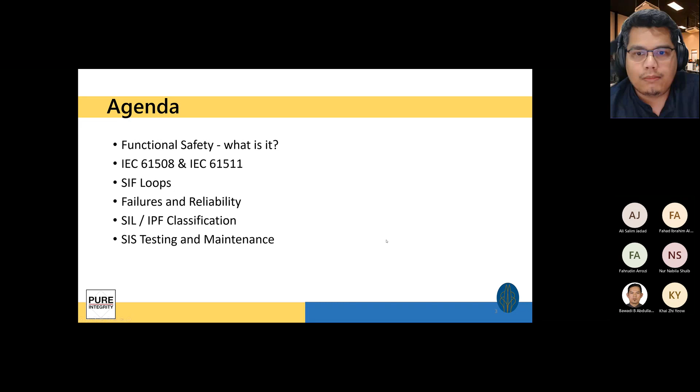So for us to understand safety systems and functional safety, we need to understand the history, we need to learn from the disasters that occurred that led us to requiring functional safety. As far back as 1976, we had a massive catastrophic incident in Seveso, Italy, where there was a large amount of dioxin released after an explosion. A large area was contaminated, eventually and unfortunately leading to a lot of people suffering from various diseases. It was in the 1970s.

Not 10 years later, in 1984, we had another catastrophic incident happening in Bhopal, India, where 40 tons of methyl isocyanate released after an explosion. It was estimated that up to 25,000 people were killed as a result of the disaster.

There are a lot more disasters, some very recent as well. But what impact did these disasters have on how we operate? These incidents made the world reconsider the safety approaches, especially when it concerns people and the environment. So the IEC published the functional safety standard, IEC 61508. And in Europe, there was a standard called the Machinery Directive, which is a legal requirement for machinery safety.

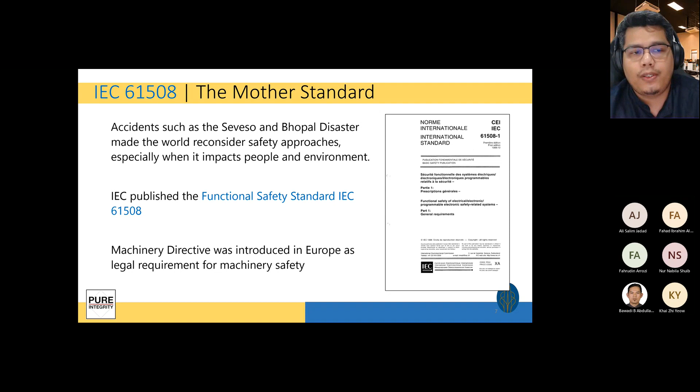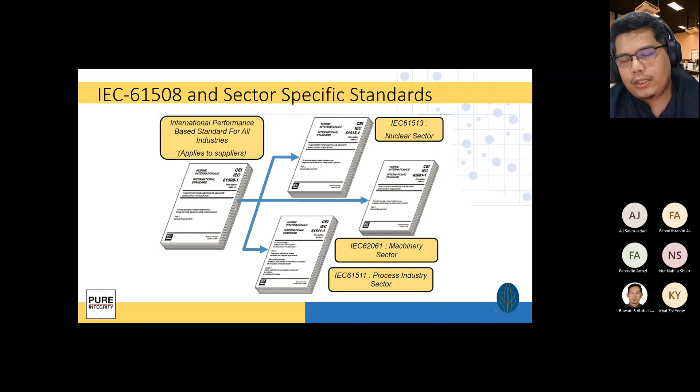So how does the IEC 61508 relate to the other sector-specific standards? The 61508 is the mother standard, from which there are sector-specific standards developed. Like for example, the IEC 61513 for the nuclear sector, 62061 for the machinery sector, and 61511 for the process safety, process industry sector. Our reference today will be talking a lot about 61511 for the process industry sector, which covers petrochemical plants, refinery, and so forth.

In terms of relationship between these two standards, 61508 is mainly the standard used for manufacturers or suppliers of safety devices. This would be companies like Yokogawa, Emerson, or Schneider Electric, who produce equipment used for the safety instrumented systems. In turn, the 61511 is mainly for system designers, integrators, and end users. So it's related, but in terms of its application and usage, is somewhat different.

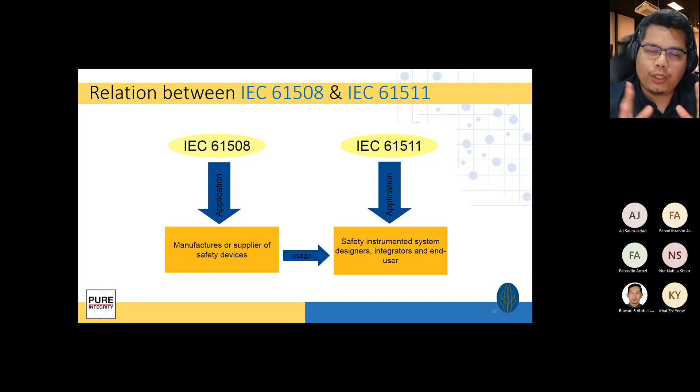So the 61511 scope again covers process industries. This includes chemicals, oil and gas, paper, pharmaceuticals, food and beverage, as well as non-nuclear power generation. It does not include embedded software, and it's intended for use by end users and system integrators. We'll be covering a bit later the lifecycle management, but essentially it covers the 11 phases within the functional safety lifecycle.

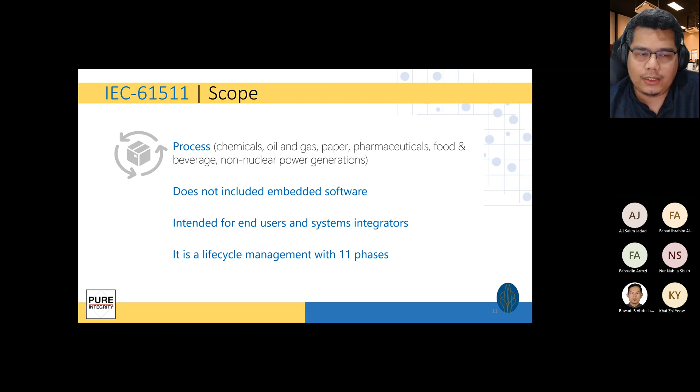So if you look at the 61511 standard, this is the safety lifecycle most often referenced when you talk about safety systems. It covers analysis - this is where you do your hazard and risk analysis, your allocation of safety function to protection layers, as well as the safety requirements specification for the SIS. So the analysis portion is mainly done mostly as desktop work.

The second phase is the implementation. So once you do your analysis, you've done your hazards, you've done your allocation, you've developed safety requirement specifications, and now it's to realize it into a system. This is where your engineering comes in, where companies design the safety systems themselves. It also involves installation and commissioning as well as validation. Not only do you need to design the safety system correctly based on the analyzed hazards, but you also need to install, commission, and validate that it's installed correctly, as part of implementation.

The operation phase of the safety lifecycle includes operation and maintenance, modification, and decommissioning. Arguably, the operation phase is one of the longest phases in the lifecycle. This is where you operate and maintain your safety systems throughout the life of the plant itself, which can span over many years. My previous plant, for example, my refinery was built in the 1960s - you can imagine some of the safety functions have been in that operation phase for at least 30 to 40 years. This is also one of the hardest phases to maintain.

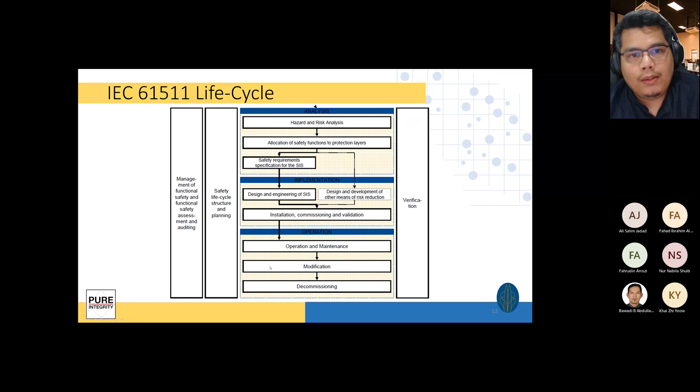So what is functional safety? Functional safety is detection of a potentially dangerous condition resulting in activation of a protective or corrective device or mechanism to prevent hazardous events arising, or providing mitigation to reduce the consequence of the hazardous event. This is the IEC definition. In short, it's about detecting a potentially dangerous condition, and you activate a protective or corrective device so that you can prevent the hazard from arising. It's an automatic function.

So the real challenge is to design the system correctly. What standards do we need to follow? What are the things that we need to consider?

There's always this balance, especially when you're operating a plant, about safety versus availability, right? And the mantra is always safety first. You want to make sure that at the end of the day, people go home safely. You want to safeguard the environment. You want to safeguard people outside the plant, your community surrounding the plant. You also want to safeguard the people inside the plant.

But at the same time, plants are there as a business, so there's also the interest to put availability first. A running plant is able to run and make profit. It's about protecting your production, protecting your asset, making sure that your products are on spec, as well as maintaining that corporate image. So it's about balancing these two, between safety and availability, and that's where doing risk assessments and balancing risk is important.

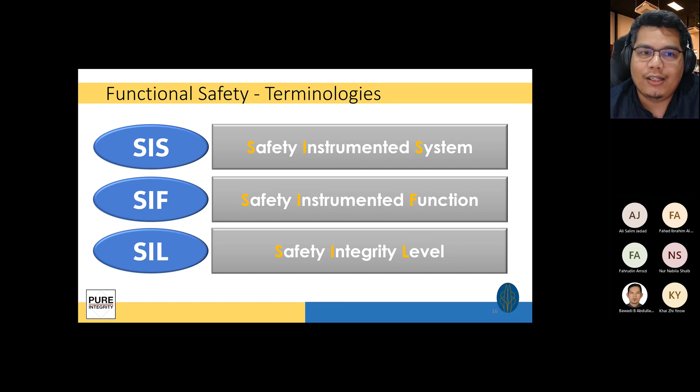There will be a few terminologies that will be used repeatedly throughout the lecture: SIS, SIF, and SIL. SIS is a safety instrumented system. SIF is safety instrumented function, and SIL is safety integrity level. A lot of abbreviations, a lot of short forms. It gets easier with time. More often than not, even for me, I interchangeably use the different terms. But yeah, so safety systems, safety instrumented functions, and safety integrity level. So what's the difference between these three?

A safety instrumented system is a set of devices and software that perform one or more safety functions. So there's a system, it performs multiple safety functions, and each safety function is a sort of a subset of a SIS. So each safety function, each SIF, has a stated safety integrity level. Each SIF will be assigned a targeted SIL - SIL 1, SIL 2, SIL 3, or SIL dash - that is related to the probability that the SIF will not work when demanded to. So let me repeat that: a safety system is a set of devices and software performing one or more safety instrumented functions, and each function has a stated safety integrity level.

Safety instrumented functions, SIF, is a set of equipment intended to reduce the risk due to a specific hazard. Its purpose is mainly to automatically take an industrial process to a safe state when specified conditions are violated. So when you design a SIF, you set conditions for which, if met, it will take automatic actions - whether temperature high or temperature low, pressure high, pressure low, and so on. So when the conditions are met, it will automatically take action to bring it to a safe state.

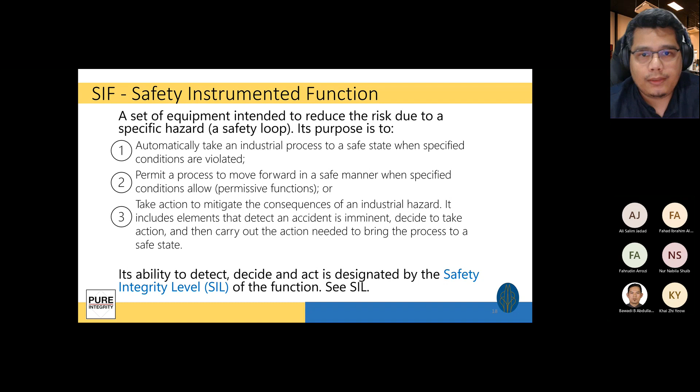Remember that each SIF has a designated SIL, safety integrity level. The safety integrity level is one of 4 levels, each corresponding to a range of target likelihood of failure of a safety function. There are different SIL levels starting from SIL 1 to SIL 4, with SIL 1 being the lowest and SIL 4 being the highest.

The difference between the SILs is the average probability of failure on demand, or looked at the other way, the risk reduction factor. For a SIL 1 function, the probability of failing is between 10 to the minus 1 to 10 to the minus 2. In layman's terms, that means the probability of it failing is between 1 in 10 times to 1 in 100.

If you go to SIL 2, it's a factor of 10, so the likelihood of it failing is 1 in 100 to 1 in 1000. SIL 3 is between 1 in 1000 to 1 in 10,000, and SIL 4 is 1 in 10,000 to 1 in 100,000. So that's the likelihood of failure.

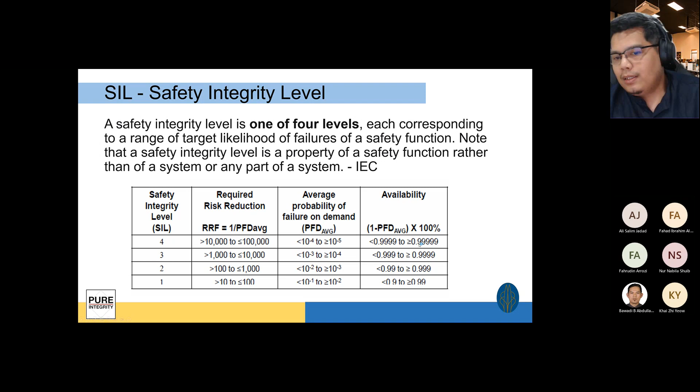If you look at it in terms of availability, it's about how many nines are behind it, so 0.9 to 0.99. Availability is highest at SIL 4, at 99.99%.

So for a SIF loop, we've mentioned before that it has a SIL level and is made up of components. There are three main subsystems within a SIF loop: the sensor, logic solver, and final element.

So what is a sensor? The sensor is basically your transmitter in the field. It senses an abnormal process condition and represents a potential hazard. This can be your pressure transmitters, temperature transmitters, flow transmitters.

Then you have a logic solver, which based on the input from the sensor, activates a defined executive response to a hazardous event. This is sort of the brains of the function - it takes the input, processes it, and executes an output.

The final element is activated to prevent the hazardous event or mitigate after-event consequences. Final elements can be items like valves, motor trips.

If I were to put an analogy to this - your sensor, if you compare it to the human body, the sensor will be your 5 senses: your eyes, your hearing, your sense of smell, your sense of touch. The logic solver will be your brain - you take that input in. If you see a car coming, speeding, barreling down towards you, your eyes take it in, your brain thinks about it, decides what you should do. Then the final elements decide that either you need to move away, run, or jump out of the way. So in terms of final elements, this is your legs and feet - the muscles that move you out of harm's way.

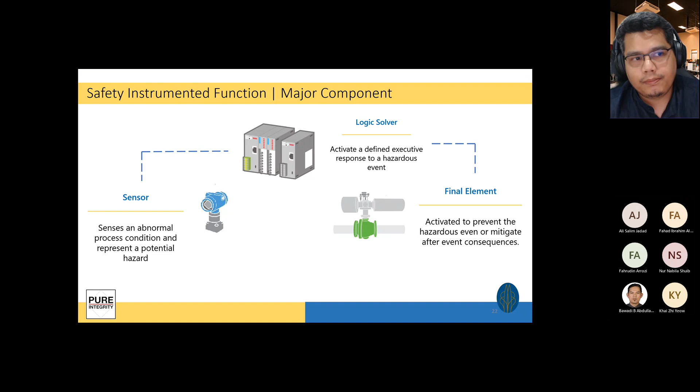So based on this diagram, which would be the sensor for the safety function? Any takers? If we look at this diagram, which of these elements is a sensor for a safety loop, do you think?

Final elements - anybody? I'll take a guess. PZA002. Right, PZA is the final element, and that would make this block here sort of the logic solver. Yeah, thanks for that, Brian.

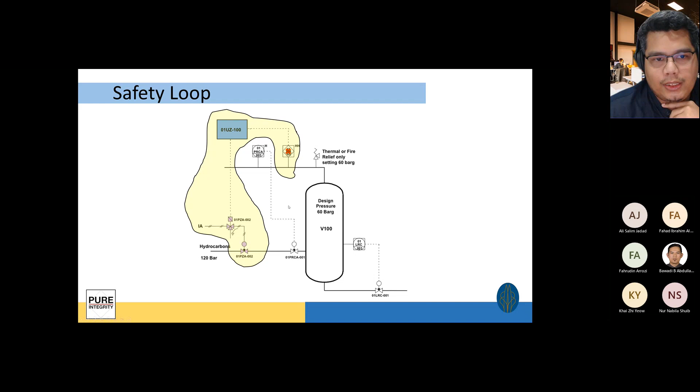So the typical safety loop in this example would be your pressure high. Your pressure control will be a control function - this will be the sensor detecting the pressure, measuring the value, and depending on the set point, telling you the pressure may be exceeding the prescribed safety conditions. Then the logic solver computes and decides it needs to de-energize or close this valve - de-energizing the solenoid and closing this valve, 01 PZA002.

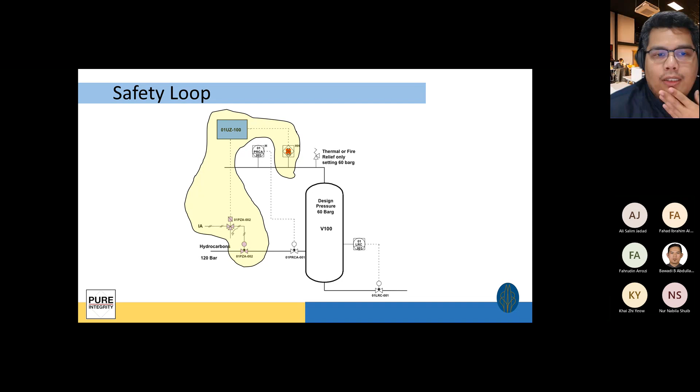Thanks for that, Fahrudin. Okay, and so it's open.

Okay, so for sensors, for those of you who have had field experience, probably you've seen this before. For those who have not, sensors can be analog sources, such as pressure, temperature, level, flow. If you look at the pictures here, these are examples of transmitters that will be installed in an industrial setting.

This can either be a DP type or pressure type, or used for flow. Anybody want to guess what this sensor is measuring? It seems like a thermocouple. Right, so this is for your temperature elements, measuring temperature.

So what the sensor does is actually convert physical values, right? So you have physical value of flow, of pressure, of temperature, detected from the sensor, and you need to send it to the logic solver in a standard or standardized value. Typically, it's using 4 to 20 milliamp current. This is an industrial standard for most industrial systems now.

In some cases, there will be sensors that use discrete inputs. Discrete meaning either on or off. For example, valve position limit switches, pressure switches, hand switches. Although it's uncommon, there are some plants that are still using discrete inputs for safety functions.

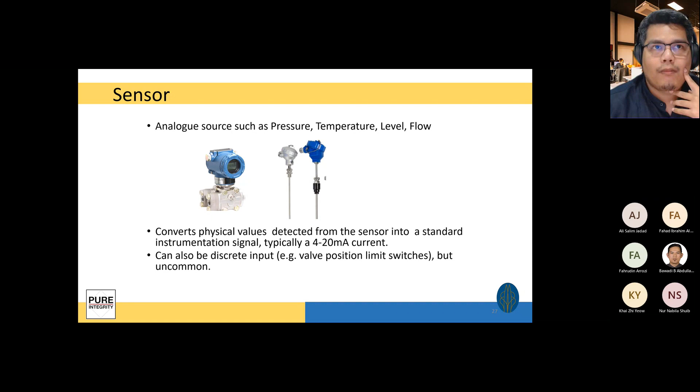Then logic solvers take the input from the sensors and make the appropriate executive decisions to change the outputs, depending on how you configure the logic itself. For example, if on high pressure, instead of closing a valve, you want it to open a valve, it can be done. It's usually fine. It depends on your specification on what's the hazard and what actions you can take to mitigate the hazard.

So a lot of the modern logic solvers are now electronic-based hardware, with the advent of microprocessors and all that electronics. A lot of the PLCs you see in the market now are all electronic-based. But in my old plant, some parts were built in the 1960s and the hardware was migrated in the 1980s, so they were still using wired logic. There are still some plants using hardware logics, but most newer plants now are using electronic-based PLC for their logic solvers.

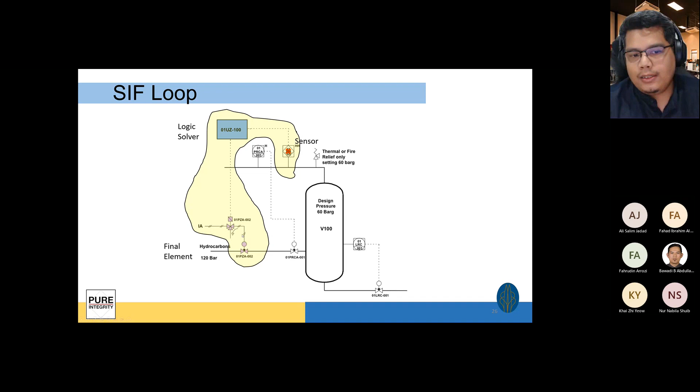You don't want to put yourself in a situation where there's high pressure and you want to close all the valves in the system - close this one, and this one - whereas closing just one will be sufficient. So it's important to identify the final elements that are critical to prevent and mitigate the hazard.

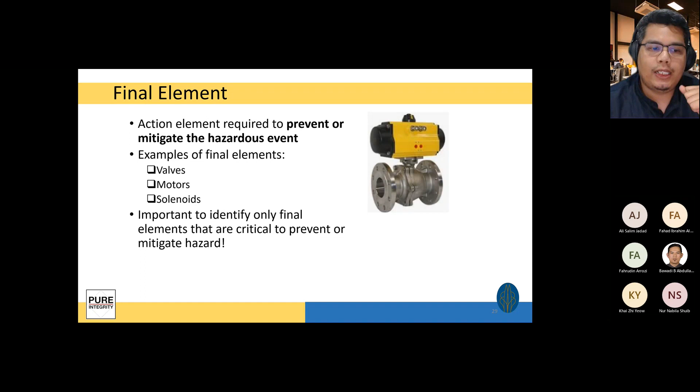Certification of equipment: the IEC standards require you to select components capable of meeting the target safety integrity level. Meaning, if you assess that a particular function needs to meet SIL2 safety integrity level, then it's important for you to demonstrate that the device selected - the sensor, the logic solver, and the final element - is capable of meeting that target safety integrity level.

One way is to use certified equipment, showing evidence of systematic capability. For example, if you buy equipment that's already specified for use in a safety function, it will typically come with documentation to say it's SIL3 capable. If you look at systematic SC3, SIL3 capable, what it essentially says is that you are able to use this device up to SIL3.

That's one method of getting certification. The other method is the prior use justification, but that requires historical data and operating experience for you to justify equipment without certification evidence - end users can justify the use based on maintenance history. For example, if equipment has been operating in their plant for the past 20 years with no problems, there's also an avenue for end users to justify its use in a safety system.

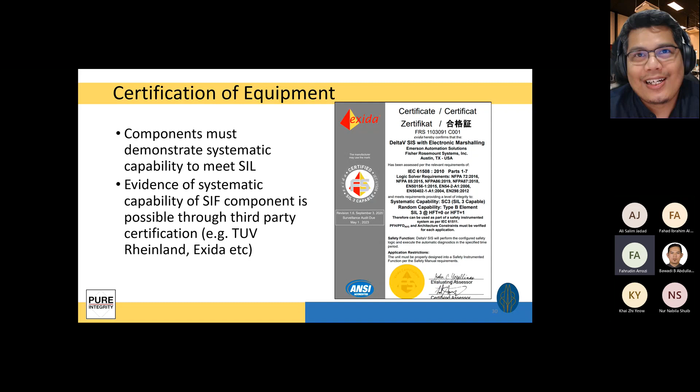So the easiest route is just to get the equipment with the certification. And everybody sort of agrees. Though there's some political aspect in terms of the budget it takes. Okay, alright, so that's safe.

So some of you may be wondering how do I determine what SIL level is required for the function, whether it's SIL1, SIL2, or SIL3. Next we'll go through SIL determination through qualitative methods. There's a couple of methods for you to determine your target SIL.

In the safety life cycle, this is the allocation of safety parameters for protection layers, where you do your safety integrity level workshops, using either qualitative methods, semi-quantitative methods, or purely quantitative methods.

An example of a method you can use is risk graph, which is somewhat qualitative or semi-quantitative. Risk matrix is qualitative and also some semi-quantitative. There's also layers of protection analysis, which is semi-quantitative, and fault tree analysis, which is a fully quantified approach for determining your target SIL.

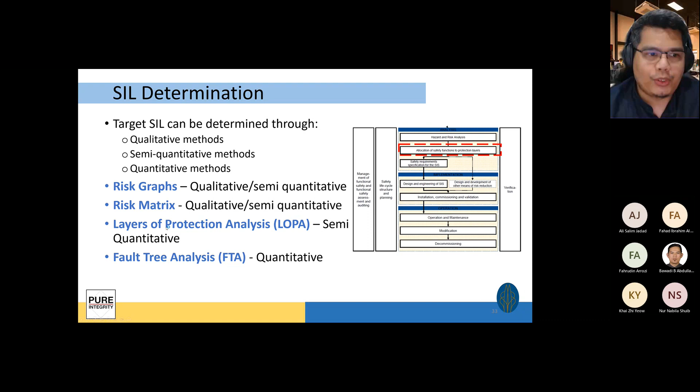So what's the difference between these approaches and why is it so different? How are they so different? We'll go into that a bit later.

What's important even among the different methods is the assessment team. Regardless of the method used, it's important that the assessment team composition should consist of experienced personnel. It is not a silo work when you do SIL assessments - it has to be done with the correct mix of experiences and expertise.

Typically it will include a facilitator to facilitate the workshop, a process engineer well versed in the process being assessed, an instrumentation and control engineer, operations and maintenance, process safety, and discipline engineers depending on the package. Sometimes you'll also need to call upon rotating equipment engineers, static engineers, or corrosion engineers, but these are typically as and when required.

So again, it needs to be a fair mix of experienced personnel as well as different disciplines. If you don't have the right mix, you might end up being too conservative or not doing enough.

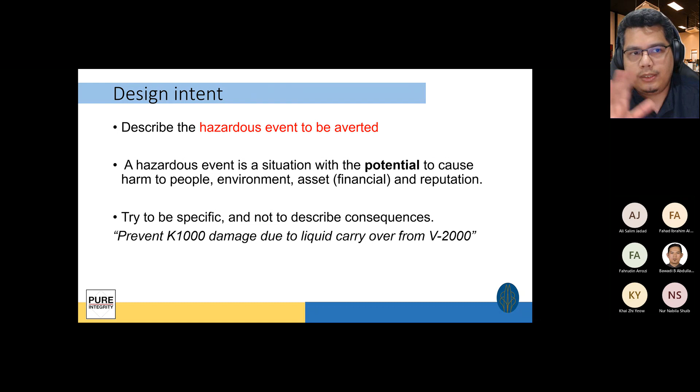We also need to describe the demand scenario - how the failures develop, the initiating events, and how it leads to the demand on the SIF. For example, if the high pressure is due to a pump tripping, you need to describe that the pump is stopped, or if there's a factor of human error, a human failure, or a failure of a control function.

Ideally, you also describe in the demand scenario what other layers of protection will act when the SIF fails on demand, if there's another control that will take action. All these demand scenarios you typically use in LOPA, to determine the intermediate risk, which is the risk without the SIF, but with all other layers of protection. It's important that you also write this down when you do the SIL target workshop.

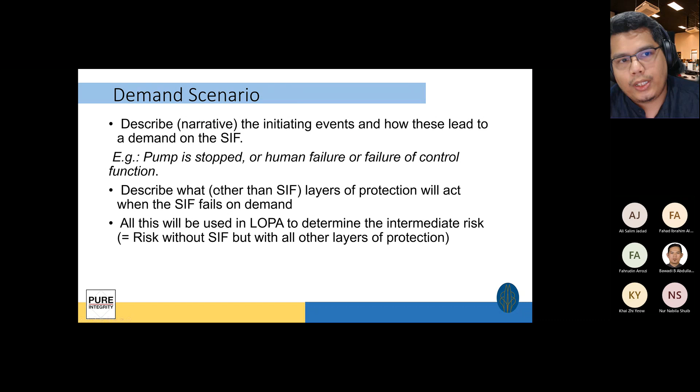Consequence is describing how the events will ultimately lead to the consequence. It's important that you focus on the potential credible consequence, the realistic worst case. This is where having a good mix of experience in the assessment team will help. For those without the necessary experience, they might not be able to imagine the more potential credible consequence.

You don't want it to develop such that the worst case is that the vessel will explode by an explosion, and then a nuclear disaster, and it goes on and on. So you want to make sure that the consequence here is credible.

So if the consequences are potentially not credible, describe the mitigation action that should be taken into account. For example, there's an example here.

If there is a vessel explosion, there's vapor release. So the consequence, the explosion, will only occur if the vapor cloud ignites, and the probability of ignition is expected in less than 1 out of 10 cases of release. Meaning, if there is a vapor release, flammable gas release, the probability of it igniting is 1 in 10 cases. So the likelihood of ignition also depends from company to company.

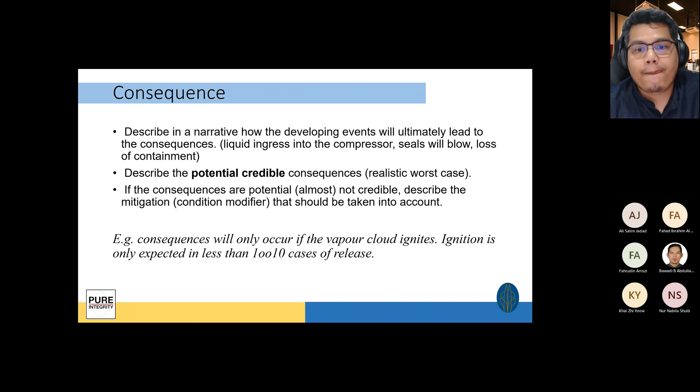The other thing to consider when doing this is process safety time - how fast should the SIF act, from the moment the hazardous situation is detected until the hazardous event occurs. So this process safety time is the time between when the hazardous situation is detected, for example high pressure, and when the explosion case occurs.

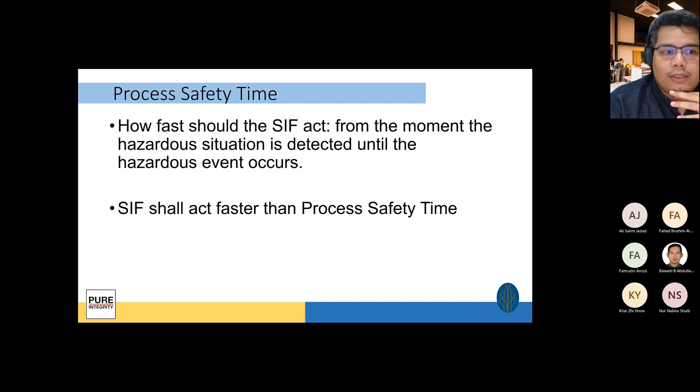Why this is important is that you want to make sure that the automatic action, the SIF, has enough time to react. For example, if between your high pressure and your vessel exploding, the pressure buildup can be as fast as 5 seconds, but then when you look at your SIF, your SIF response time is 10 seconds, that means your SIF is unable to respond fast enough. That might require some redesign on the SIF function.

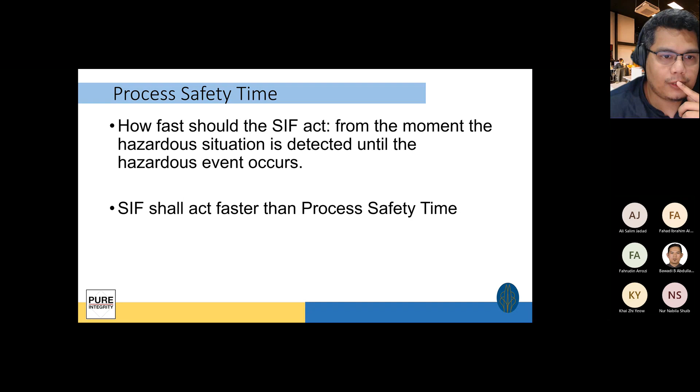So SIF response time is a determination of the process requirements concerning the response time of the SIF to achieve the safe state of the process. So your sensor itself is not going to act immediately.

For example, temperature - when there's temperature buildup, the temperature sensor might take up to a minute to detect the temperature buildup, for the metal, the thermowell, to heat up. So there's a sensor response time that needs to be considered. Even for pressure transmitters, it's not going to be immediate - there will be some lag, 1 second, 2 seconds.

The logic solver also needs some time to think about it - when it detects the input from the field, it needs some time to process and then decide the course of action. And then there's also the final element response time.

If you imagine valves, if you ask it to close, it will take a few seconds depending on the size to close. Some will say the rule of thumb is 1 inch a second, so if you have bigger valves, it will take longer for it to go from fully open to fully closed, or from fully closed to fully open. So the total response time for the SIF needs to be faster than the process safety time.

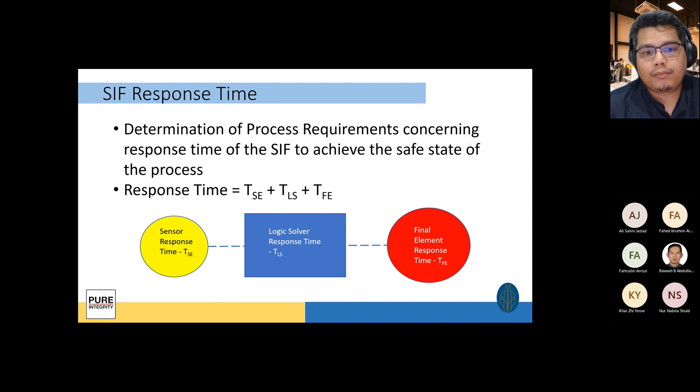So again, let's look at SIL determination. If you remember, there's risk matrix, risk graph, LOPA, and FTA. So let's look at risk matrix - what is risk matrix?

So based on the consequence, they then decide what's the severity. For example, to people, will it lead to no injury, or will it lead to fatality, or will it lead to permanent disability? That's the consequence severity.

Then as a team they discuss the likelihood. What's the likelihood of it happening? Pressure high or overpressure and all that, depending on experience, is it 1 in 15 years, 1 per 20 years? Depending on the demand scenario, which we discussed earlier, what will be the likelihood of it happening?

Based on the likelihood and the consequence, they have already assigned the target SIL. If the consequence can lead to permanent disability, you might lose a foot or a hand, but the likelihood is 1 in 1 to 5 years, then the function needs to meet a minimum of SIL1. But if the consequence can lead to fatality, and the likelihood is also 1 in 1 to 5 years, then it will be a SIL2 function.

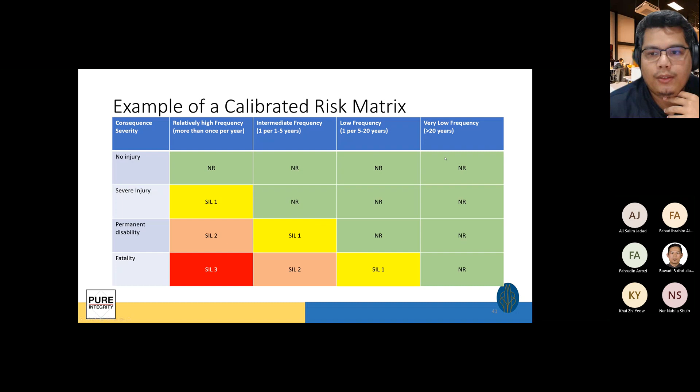So risk matrix is somewhat easier to execute in terms of determining the SIL, but it's a bit harder for you to calibrate. How do you know that this one is required and this is not? A lot of justification is needed to qualify which sectors, which quadrants in the risk matrix require a SIL or not.

So whenever a risk graph approach is used, a definition is required. For example, the C parameter, consequence parameter - depending on the consequence, you need to calculate whether it's CA, CB, CC, or CD, whether it's in the range from 0.05 to 0.5, or more than 0.5 up to 5.0. This is calculated based on the description, based on the consequence.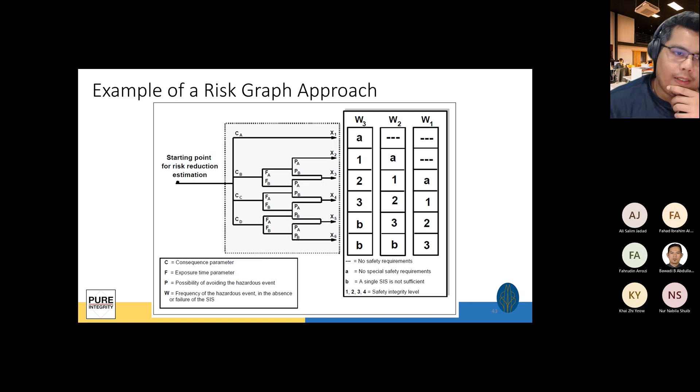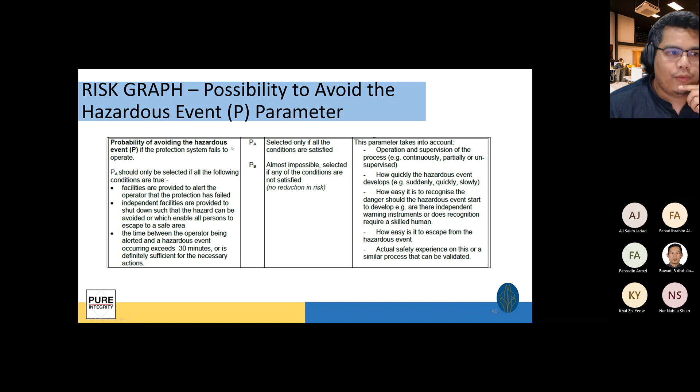So again, once you've defined all your consequences, your demand scenarios, discussed them and written that down, and what other safeguards are in place, then looking at the table is easy enough to determine which parameters are required, as long as you have the consequence defined. And from the consequence, you can look at exposure probability, how often people are there, probability of avoiding the hazardous event, and then the demand rate.

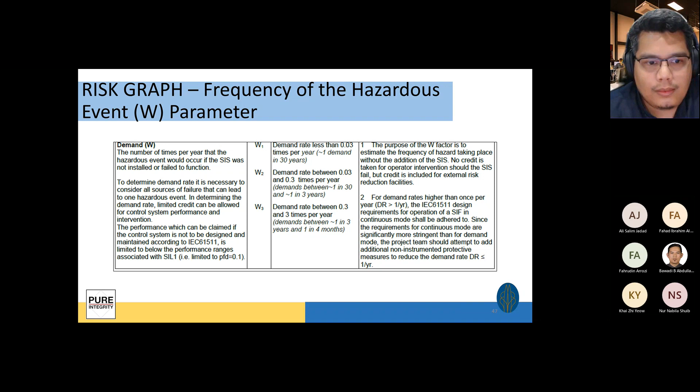So the risk graph that you saw just now is an example for personal injury, but you can also do risk graphs for asset loss and environment, right? So you can also assess impact to people, impact to environment, and impact to asset. Some companies will also assess impact to reputation. One way to remember is PEAR, like the fruit: People, Environment, Asset, and Reputation.

So you can also generate risk graphs for asset loss and environmental impact. It's important that once you assess the SIL for personal safety, asset loss, and environmental damage, the function should be designed to meet the highest integrity level. So if you get a SIL 1 for personal safety, a SIL 1 on asset loss, and a SIL 2 on environmental damage, you should design the function to meet a target of SIL 2, the highest SIL, because of the three.

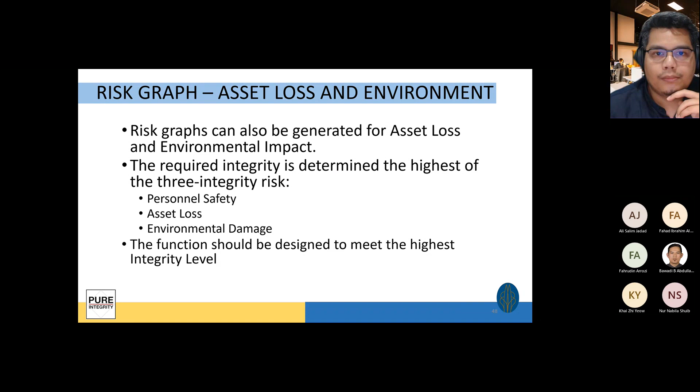Let me do a quick time check. It's 3 o'clock. You guys want to take a break before I continue, a 2-minute toilet break, or do we continue? I think 5 minutes break is better. Let's take a 5-minute break, back at 3:05. Okay, thanks.

All right, shall we continue? Okay, all right, okay.

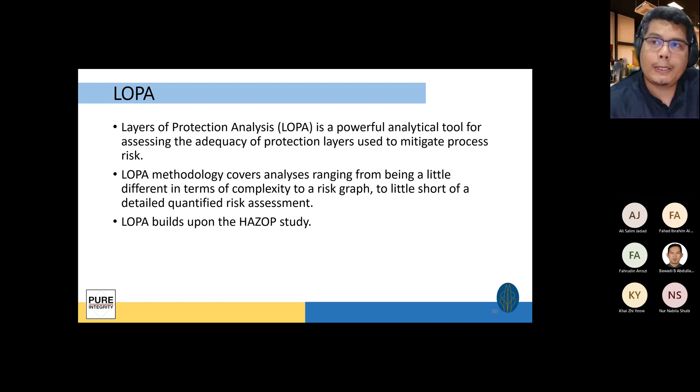So LOPA in its basic form is based on the Swiss cheese model. Pretty sure most of you have heard this already. So for hazards to progress and develop into losses, there are multiple layers or barriers with latent failures that would need to fail. You can have control valve failure, and in between there's an alarm and operator intervention failure, and they can also have a SIS failure, ultimately leading to losses. So LOPA at its most basic form is based on the Swiss cheese model.

So to do LOPA, the approach can be taken as follows: based on the consequence that you discussed earlier, you evaluate the severity of the consequence. You compare the severity of the consequence with a tolerable risk criteria, or TMEL—I'll touch on that in a bit. Identify initiating events and frequency, and if the overall risk is greater than the tolerable risk criteria, evaluate barriers or IPLs that reduce risk to meet the tolerable risk criteria.

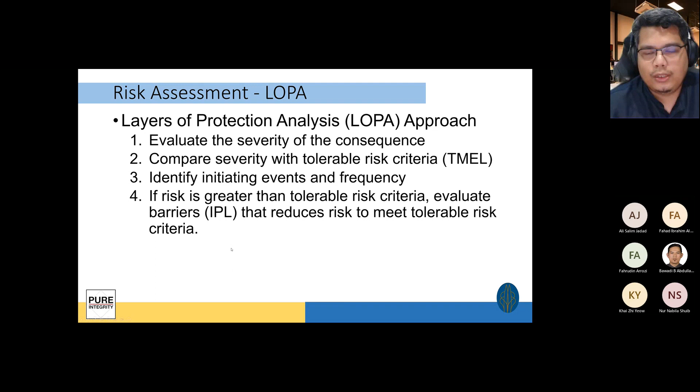Let's go through the approach. So earlier we've discussed consequence. You discussed in a workshop with the team what are the consequences, whether it leads to fatality or people injury, whether it will result in asset damage, or result in environmental impact.

So based on the consequence, we will need to benchmark it against, or determine, the TMEL. For example, this is one example of a table developed for you to determine the target mitigated event likelihood, which is the number here—the target event frequency.

So for example, if we say that the consequence just now will result in a fatality, then the target mitigated event likelihood, or TMEL, will be 1e-4. This will be your target risk reduction. But if the consequence can lead to multiple fatalities, for example, then your target mitigated event frequency will be 1e-5. Again, it depends on your consequence—environmental impact, whether it's severe environmental impact, or whether there's a massive effect on the environment—you will need to select which TMEL or event frequency is your target.

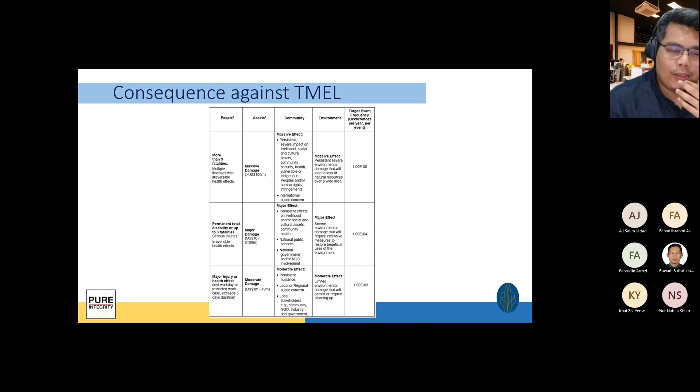Okay, so minus 5 means to say, we'll look at later what this number means.

Right, so the next step was to determine the initiating events. As discussed earlier in the workshop, for the hazard to develop, failures must occur, right? A pump has failed to stop, a control valve has failed to function, and so on. A human error has to occur. So you have to put a number on how frequent these initiating events or demand scenarios are anticipated.

So initiating event is the minimum combination of failures or errors necessary to start the propagation of the incident sequence. As an example, the failure frequency, for instance 1 multiplied by 10 to the power of -1 per year.

For example, this will happen once every year - is it? No. 1 times 10 to the -1 is 0.1, so it's 1 in 10 years. That's one way of looking at it. 1 in 10 - when you say 1 times 10 to the -2, it will be 1 in 100 years. So 1 times 10 to the -1 is 0.1, which is either 1 in 10, or 1 over 10. So that's the initiating event frequency.

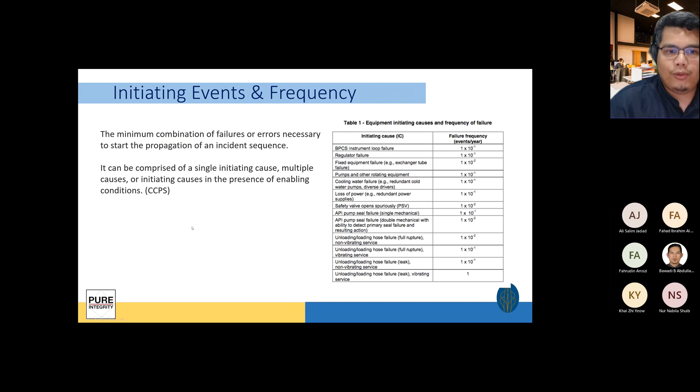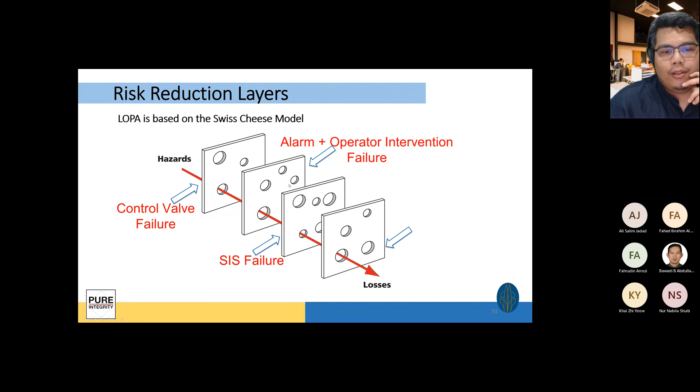So, auditable, right? As with many things, if you look at the barriers, there's holes, there's latent failures. We need to say that these barriers can fail. So you need to make sure that the barriers or the IPLs can be maintained and evaluated that they can properly function.

For example, if you take a relief valve as a barrier, you have to make sure it's maintained and can be evaluated to properly function. You cannot take an equipment like this RV as overpressure protection and say you're unable to do maintenance on it, you just hope it works. Then it doesn't become a valid IPL.

So barrier validity sometimes can take a bit of discussion during the LOPA workshop, to determine whether it's effective, whether it's independent - that may be faster or easier - and whether it's auditable, meaning it can be maintained and evaluated if it can properly function.

Doctor, I have a question. Can you elaborate more on IPL? How to identify IPL, please? There's an example later that we can go through, yeah, there's an example. I think we'll go to the example.

So an IPL can be a lot of things. It can be analyzers, it can be instrument barriers. For example, if there's a pneumatic interlock installed, then there will be an instrument barrier. Heat tracing can also be considered a barrier. So there's a whole list of barriers you can use. This is just a snippet of an example from a company standard.

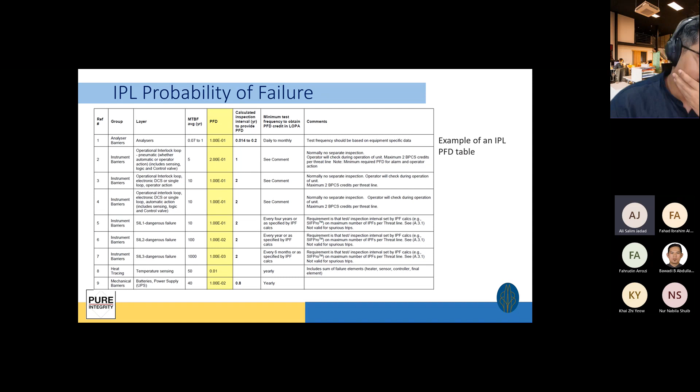So it can be a safety critical device, yeah, that's a good point. Typically, if you take credit for an equipment as a barrier, most companies will then determine or classify that equipment as a safety critical device or safety critical element, SCE.

An example of another, alarms - high alarms, low alarms - that can be taken as a barrier. Pressure relief devices, that's typical for you to take as an IPL. So these items, if you take them in a LOPA, need to be maintained, because it's preventing the propagation of the hazard. Then this would typically be marked as an SCE item.

Safety critical element, okay. So as an organization we need to detect hazards, and from hazard study we can have a LOPA study, and from that we can also identify the IPLs.

Yep, that's great. So if, for example, you do HAZOP, you identify safeguards. In the HAZOP, those safeguards can then be brought into the LOPA study to determine whether they are valid IPLs, because during HAZOP you do not go through the rigor of testing whether it's big enough, whether it's auditable, whether it's independent - usually it's just identifying all the safeguards. The LOPA is where you determine whether the safeguards identified are valid to be taken as valid IPLs, or independent protection layers.

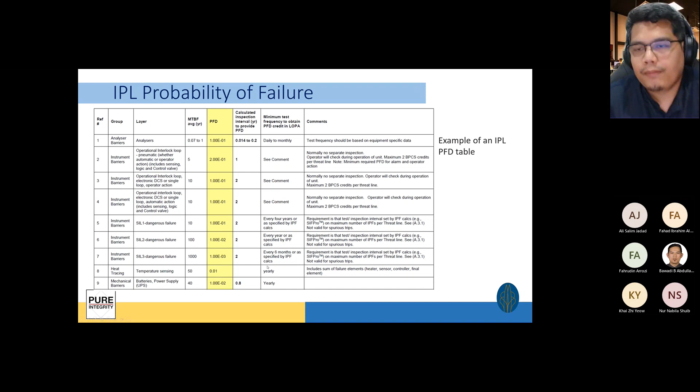Okay, let's look at an LOPA example. So again, in the setup, you have a pressure vessel, feed coming in, 50 bar gauge. There's a pressure control through the overhead with the RV to flare, controlling this control valve. There's a level control valve here, right?

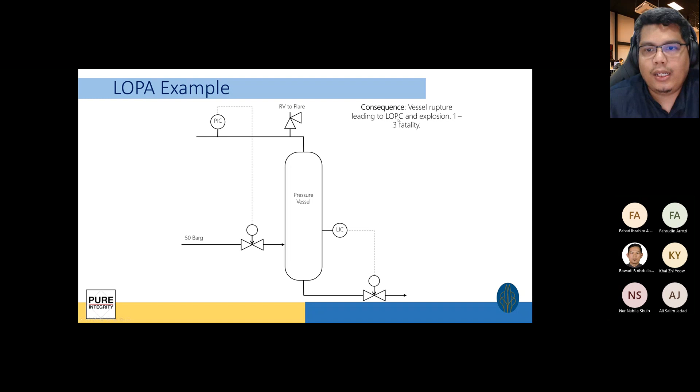So let's say, for discussion's sake, that the consequence of overpressure of this vessel is a vessel rupture leading to loss of primary containment, LOPC, and then explosion, resulting in up to 3 fatalities, 1 to 3 fatalities.

So if you remember, based on the consequence, we need to determine the consequence severity. Identify the consequence severity. So based on the vessel rupture and LOPC and the explosion, we say that in this case it's a severity D, with the TMEL of 1 times 10 to the minus 5, because you have a lot of fatalities.

Okay, the second step is to identify what can cause a high pressure. So we can say that this control valve control failure, PIC - this pressure control is supposed to maintain the pressure inside the vessel, but let's say it malfunctions, it opens more than required, then you can have more pressure into this vessel, resulting in an overpressure of the vessel. So one of the initiating events we can determine is the control valve failure or PIC failure, which is 1 times 10 to the minus 1.

Which is 0.1. Okay, so this is where, Ali, you mentioned bow tie, right? So this is where I think it will look very familiar to you. So if you were to put this in a straight line: control valve control failure is 0.1, 1 times 10 to the minus 1.

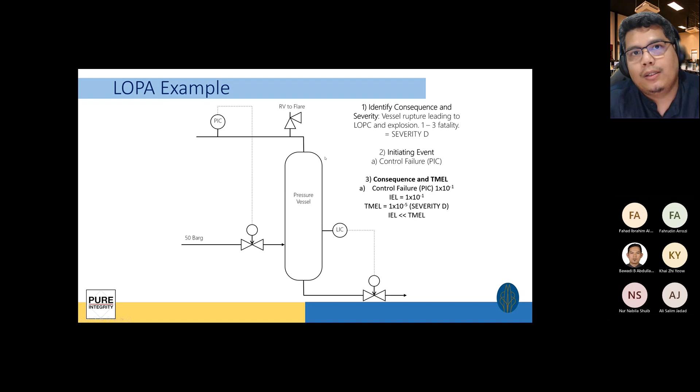Right, and as I've already mentioned, if you do LOPA in actuality, there's a lot more factors you need to consider, or what we call conditional modifiers. For example, what is the probability of explosion? Not all gas releases will be ignited leading to explosion - it could be 1 in 10 cases or 1 in 5 cases, depending on the product, depending on the rate of release. There's also other conditional modifiers - for example, not all overpressure cases will result in catastrophic damage to the vessel, whether it's 1.5 times, 2 times, or 3 times the design pressure.

So it can be very complex to do LOPA, but fundamentally it's about taking into consideration your target, taking into consideration your available barriers or available IPLs. You can also take into consideration other conditional modifiers, and the gap between your intermediate event likelihood and your target will be your target SIL.

Okay, alright, thanks for that. So after LOPA, we shouldn't have - you can see we might still have an accident, but the possibility will be very low. So it's not perfect, it's about reducing risk to a tolerable level. You cannot eliminate risk, but you want to make it tolerable.

Actually, the problem we haven't seen is linking the HAZOP study with LOPA in a practical way in the industry - till now I haven't seen this. We do have some kind of challenge in some systems where we are looking for a system to address the risk, whether it is tolerable still, or we still need to take this risk or no. So LOPA is good for that, but as I told you, in practice, I haven't seen this kind of practice in place right now.

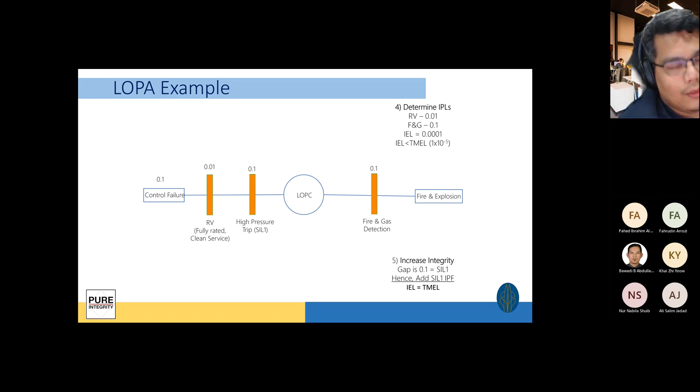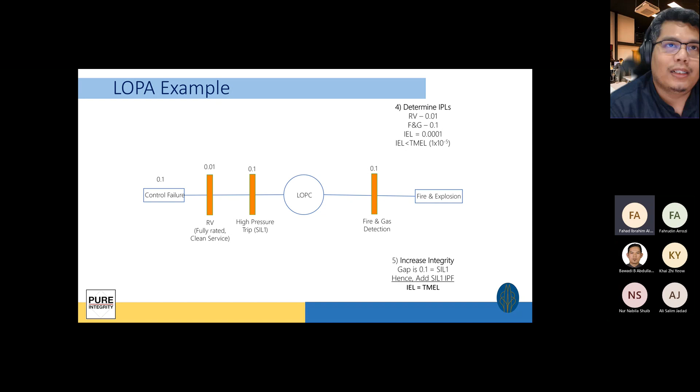I mean, if you do bow tie, LOPA is about then putting the numbers to the bow tie, assigning the numbers, but as you know, bow tie is not quantitative, it's qualitative. I feel if you do LOPA, then you will have a kind of quantitative assessment. Semi-quantitative. Yeah, exactly.

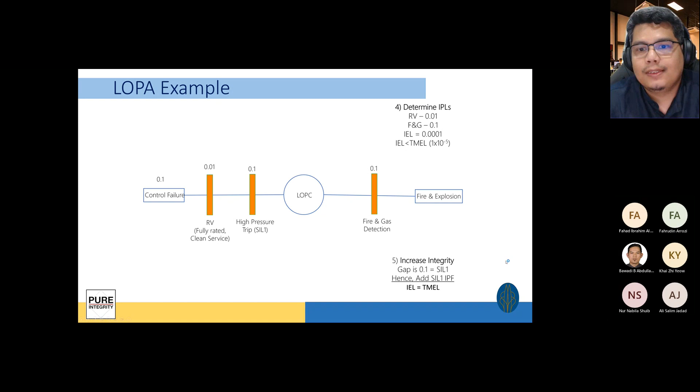Okay, alright, hope that was okay. Quite a lot to cover. How much time do you have? 30 minutes. Okay, let me try to breeze through the rest.

Okay, the other thing to talk about is the success criteria. Success criteria is the statement that defines when the sensors have successfully detected the hazardous situation in the initiating event. For example, in this case you can have 1 out of 1 - PZ pressure trip, 1 must detect to trigger a trip. You can have 2 out of 2, where both must detect to trigger a trip. Or you can have 1 out of 2, meaning either one - if either one detects, then it will trigger the trip or the automatic action.

Maybe just a question, if anybody knows. So from these 3 architectures, 1 out of 1, 2 out of 2, or 1 out of 2, which one do you think has the worst probability of failing on demand, the worst, highest probability of failing?

So actually, there are two. Having the voting architecture, either it's good for reliability or good in terms of safety. For safety, especially avoiding dangerous failure, 1 out of 2 is better because we have the backup of the redundant system, but only one trigger is needed to trip the system. So that's good for safety, but not good for reliability. And the worst for safety is 2 out of 2, but it's good for reliability. That's the difference.

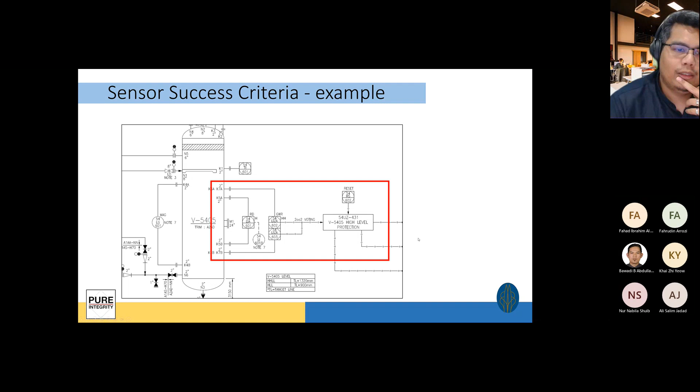Similarly, there's also success criteria that needs to be determined for your final elements. For example, here it's 1 out of 2 — either one must close. If it's a fail close valve, imagine you're trying to stop flow from left to right. For you to stop the flow going through, is closing one sufficient, or must you close both valves? One is sufficient, right, so just closing one. Either one valve must close, hence why there is 1 out of 2.

Now, if you take this example, FC, fail close, again from left to right — if you want to stop flow, is closing one sufficient, or must both valves close? Now both, because each one is going to a different location, the right side. Yeah, so both valves must close. Hence both valves must close, right.

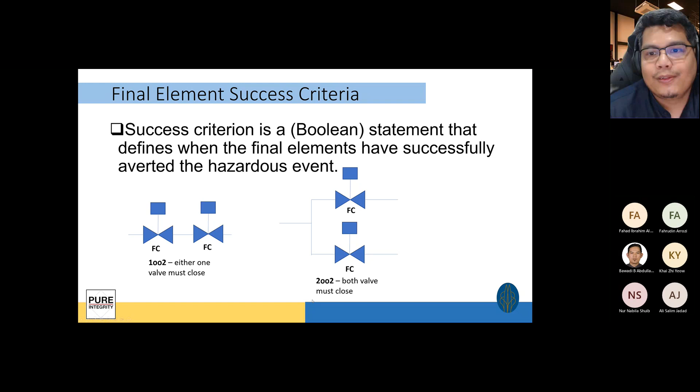So this success criteria is important for you to determine based on the setup of your plant. It's not one size fits all. It depends on whether your valves are fail closed or fail open, whether they are parallel lines or series lines, and what hazard you're trying to mitigate. This is also required for you to identify, ideally during the SIL classification. For example, here, fail close doesn't say whether it's 1 out of 2 or 2 out of 2 — that's something you have to determine, and for fail close, closing either one will be sufficient.

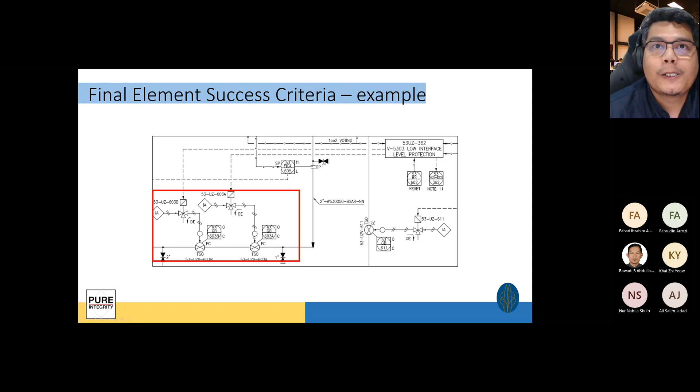Okay, let's look at this exercise. Maybe just have a look at the setup.

Think about this level low. What would be the design intent of this level low? What are the demand scenarios? What will be the consequence and success criteria? I think low-low should trip the pump. Okay, that would be the design intent. So, design intent and demand scenario.

What's the design intent? For example, low alarm will trip the pump. Low demand scenarios, maybe because of low level, there could be a vacuum happening to the tank itself. So we might need to introduce a rupture disk to the tank to avoid the tank getting damaged.

Okay, so consequence: I hear tank damage. Any other consequences that you think might happen on level low? You can see pump damage, dry run. High pressure, low pressure interface - if the vessel is high pressure, then we end up with issues downstream of the pump.

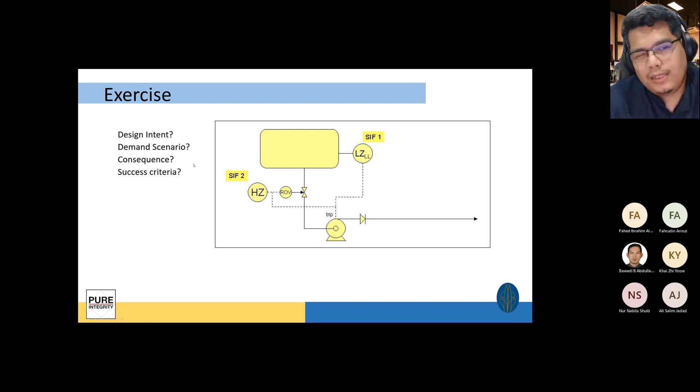Okay, so design intent on low level: protect the pump from running dry. That could be one of the design intents, right, depending on the parameters here. The demand can be because of loss of control - maybe there's a level here that you lose control of.

And then the consequence here, as you say, could be pump damage because of pump leakage or pump dry running, right? Maybe you have possible injuries or local damage. Again, this consequence can be debated in the workshop. Success criteria will be the low level at 1 out of 1, and tripping the pump will be sufficient to stop the pump damage. This will be one example - one of the things we need to discuss during the workshop.

Okay, 15 minutes left. I'll just breeze through. Can we go back to the previous sketch of the simplified diagram?

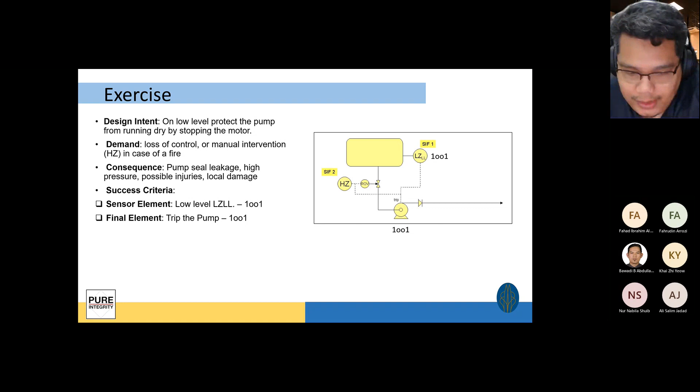All right, thanks for that. We have about 15 minutes left. Let me see if I can power through this one.

Okay, so SIS failures and reliability. SIS is not immune to failure - it's also prone to failures, right, the safety systems. There are two types of failures: one is safe failure, one is dangerous failure. The difference is that safe failure can potentially cause the process to achieve or maintain a safe state - meaning when it fails, it trips the plant and everything becomes safe. That's what we call a safe failure. A dangerous failure is a failure affecting the equipment within the system which causes the process to be put in a hazardous state.

Or it puts the system in a condition where it may fail to operate, right? This is called a dangerous failure. It's supposed to trip, but doesn't trip. That's a dangerous failure.

The safe failure is that it's not supposed to trip, but it trips, right? So you have a nuisance trip. That's a safe failure.

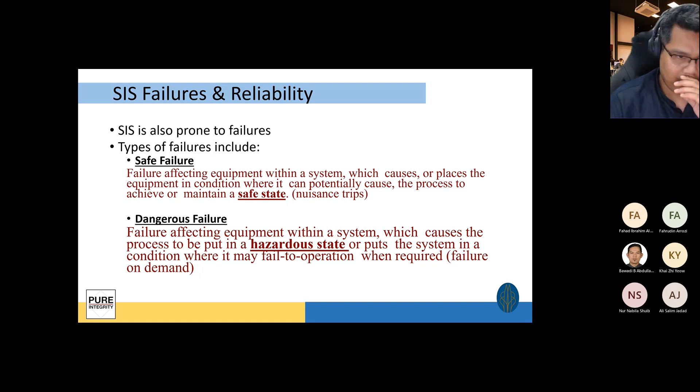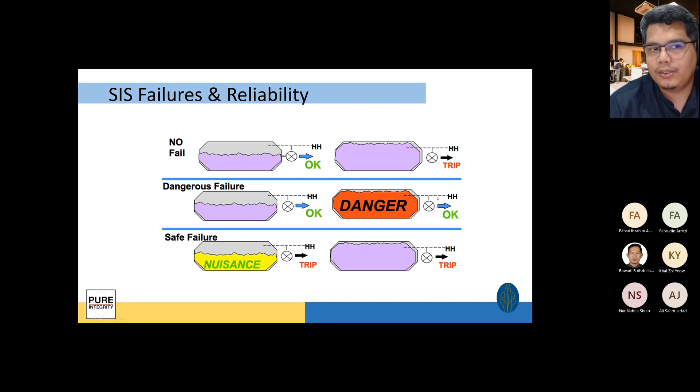A dangerous failure is that it doesn't trip on demand. It's supposed to trip, but doesn't trip. So when you do a safety system, there's a fair bit of calculation required based on the failure rates. The failure rate, when you look at the datasheet, is expressed in lambda or FIT, failure in time.

So there are 4 parameters you need to look at. Lambda S stands for safe, lambda D stands for dangerous. SD stands for safe detected, SU stands for safe undetected failure rate, and DD is dangerous detected, DU is dangerous undetected.

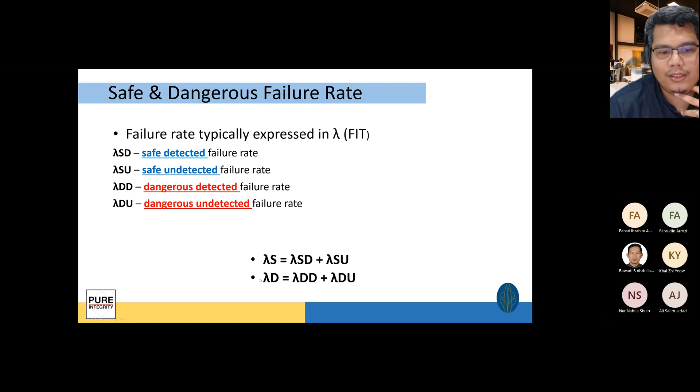Dangerous detected failure - when you say detected, it means it's detected by diagnostics. Your equipment has self-diagnostics, it can do self-tests, it will detect what failures have occurred. That will be covered under dangerous detected.

There are still failures, remnant failures that are undetected by diagnostics. One way to reveal the failures is by doing maintenance or proof testing, but that still doesn't cover all the dangerous undetected failures. There's still a small portion of dangerous undetected failure. Unfortunately, it can only be revealed through incidents. So the aim here is to reduce this dangerous undetected failure as much as you can, either through increasing diagnostics coverage, or by revealing more failures through proof testing.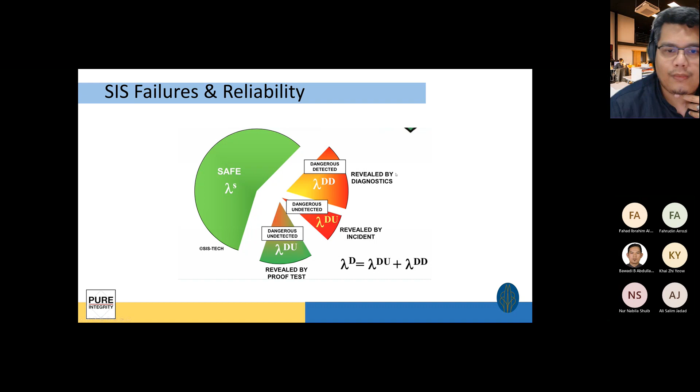If you open the certificates or the failure rate data from manufacturers, the failure rate is always expressed in FIT, which represents failure rates, how many failures occur every 10 to the power minus 9 hours. So 67 FIT is 67 per 10 to the power of minus 9 hours. The lambda is always in hours.

The failure rate data, where do you get it? In this example, it's from the manufacturer. But you have to note that the failure rates may differ depending on the sources that you take the failure rates from.

Among sources of data you can take is internal data. So big companies like BP or Shell are big enough to have their own internal failure rates taken from their manufacturing sites. They may generate their own failure rate data.

The other source of data is generic industry data. There are organizations like OREDA or SINTEF that take this data from various companies, from BP, from Shell. They're independent organizations - they take it and create a handbook of failure rates. These are published industry data.

Or the other source is manufacturer data. Manufacturers will do their own lab testing, have their own records from clients, from customers, and they will publish their own failure rate data.

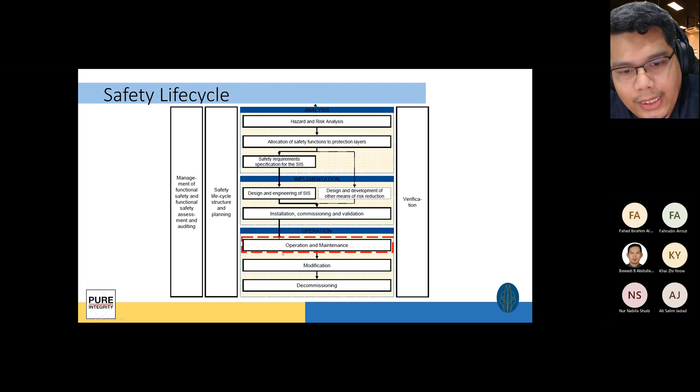Okay, so we've covered analysis. We're now covering operation and maintenance. Like I mentioned earlier, this is one of the longest phases. It's important. Remember, when we take IPLs, it has to be maintained, right?

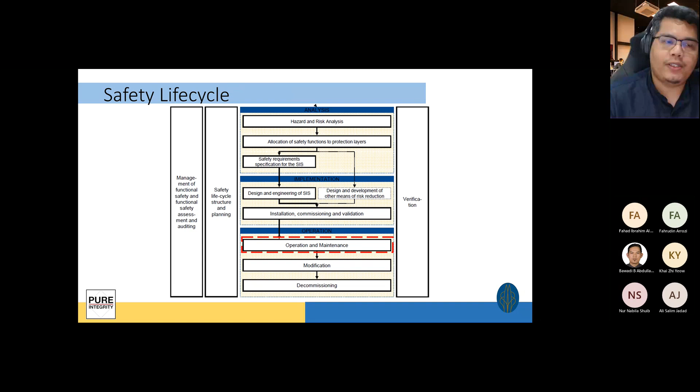Same as safety systems, you have to maintain it. Maintenance activities, there's a few approaches to doing it. There's reactive maintenance, where you wait until it's broken and then you fix it, some call it run to fail. You don't want to do this with your safety systems, right? You don't want to run it until it breaks.

Preventive maintenance, right? You do it because it may break, so you better fix it anyways. Or the other one is predictive maintenance. You know when it's expected to break, so you plan for that. This one requires a lot of data, right?

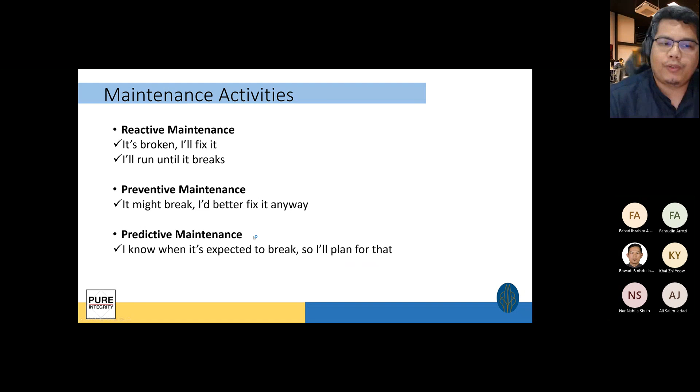So you want to make sure that you have routine maintenance for your system, because you want to make sure that it's safe, it's capable to operate on demand, right? The maintenance you can do is simple things like cleaning, depending on where you are there might be dust ingress and all that, lubrication, calibration, and then measurement accuracy of your process sensors, right?

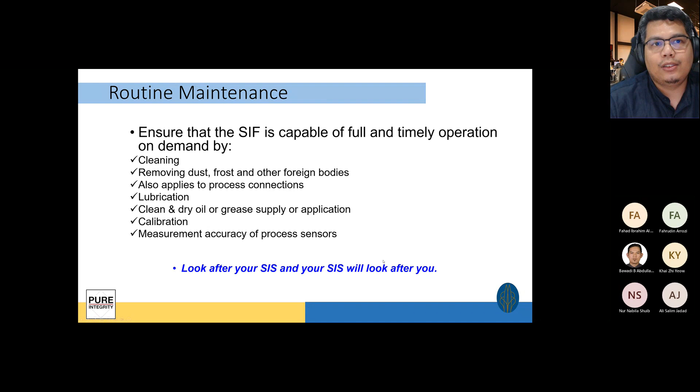Okay, so you have to make sure that you look after your SIS, because you are depending on the SIS to actually look after you, to act automatically to prevent or mitigate the hazard.

Okay, so why do we do proof testing? Again, functional safety is about achieving SIL, and SIL is based on, if you remember, the PFD average. So you want to maintain the PFD average.

As equipment performance, any equipment will degrade with time, and as it degrades, your probability of failure on demand will also increase. You want to also make sure that you do regular maintenance to detect and repair failures, to make sure that your PFD average is sustained.

And every so often, you want to make sure that your equipment is restored to as new condition. Bearing in mind, it's the same as your brakes, right? On your car, every few hundred kilometers, you want to make sure that you service your brakes. Why? Because you're depending on it to keep you safe, right? And then after a while, you need to change your brake pads, for example, to as new condition.

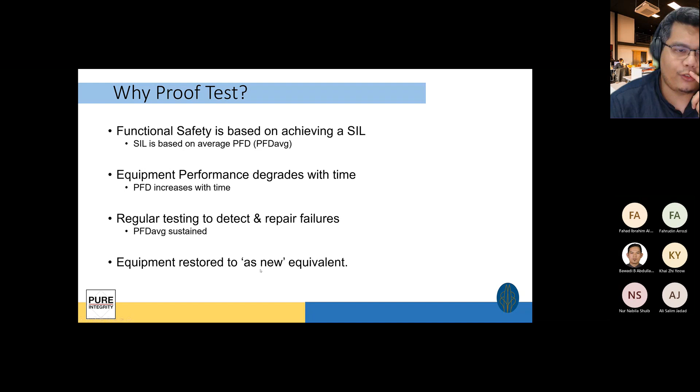Okay, so quick look at this. If you look at the example of the proof test, right, whenever you do testing, what happens? Let's say you're here, right? As time goes on, this line goes up. This is your PFD average. Your PFD average goes up.

So when you do your next test, your next maintenance, you actually bring your PFD average back down, assuming you do a perfect testing. Same here, right? If over time the probability of failure goes up, but when you do your test interval, or your proof test, it sort of brings the PFD average back down.

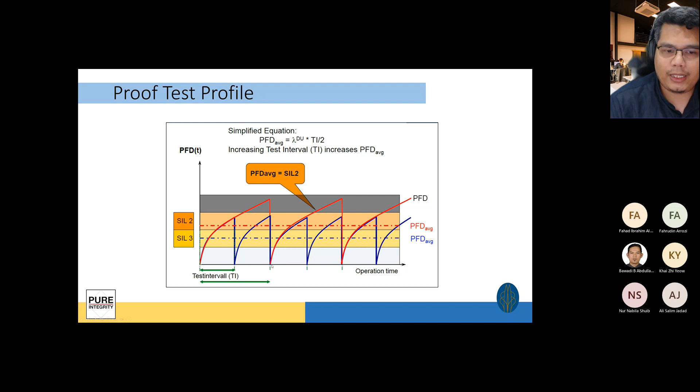Specific test procedures are required to be developed for the safety system. These test procedures will be used by maintenance to do testing on the sensors to see whether it's functioning as required.

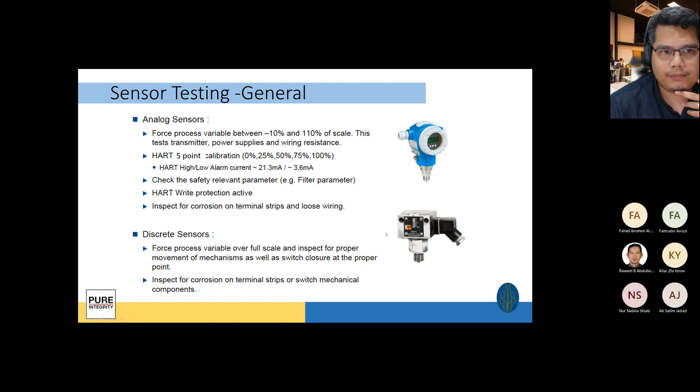Same thing for discrete sensors and switches. These are general steps. I think if you're into operation and maintenance, you will be familiar with this already. I'll skip this one now.

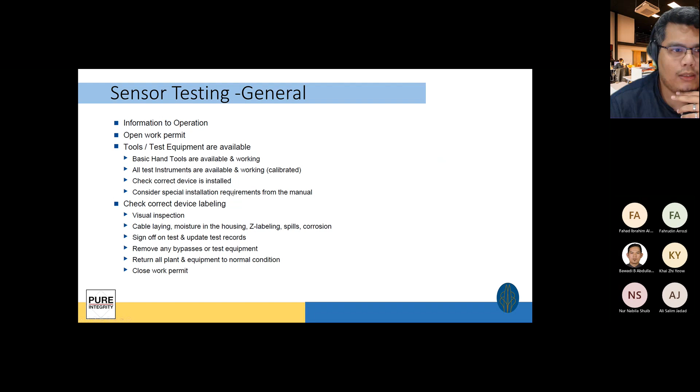This is a sample of a proof test check sheet, a check sheet that you can give to maintenance so they can do inspection on site. Do visual checks, check that the sensor is trending okay in the DCS, check if there's hardware protection, whether it's still there or not.

Simulate the process conditions and see whether it's reading correctly and accurately. And if needed, you want to bring it back to as-new condition, you might want to overhaul or replace the equipment.

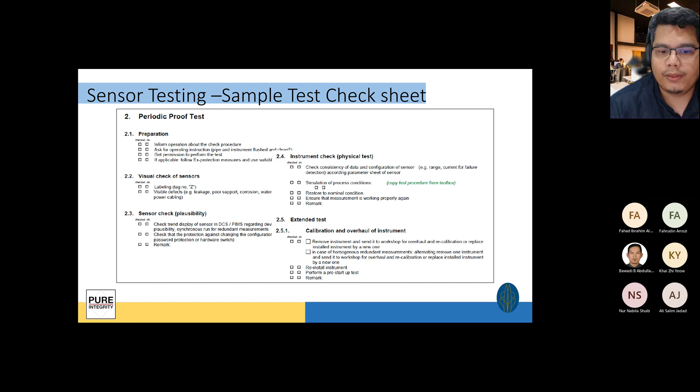For final elements, for valves, it will be similar. There will be things like visual inspection. You can do things like interlock tests, to see whether the valves are closing and opening as required based on the conditions of the logic.

You can also do rebuild, and leakage tests. If the valve is closed, is it fully tight? Is it stopping the fluids from passing through as required?

There are also some tests you can do for final elements: again, visual check, interlock check. If the valve is supposed to close on pressure high, you need to test it, once a year, once every 3 years, once every 2 years, depending on your target SIL.

Overhaul: the valves can be in service, but then every turnaround, for example, you need to bring it down and inspect the internals of the valves, whether it's still functioning as required, whether everything's okay, or whether you need to replace the soft parts.

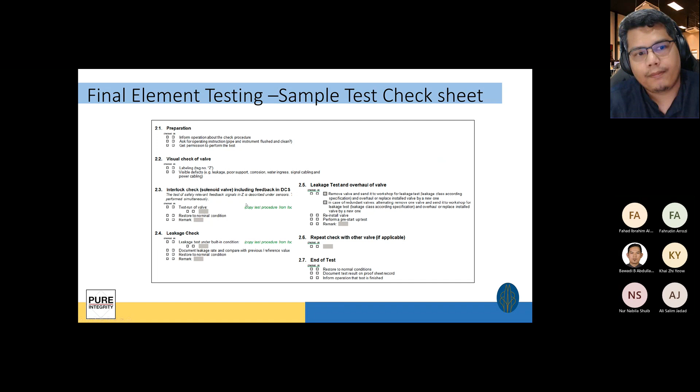Okay, I think that's the end of my slide. Oh yes, it's 4 o'clock. All right. That's the end of my presentation, any questions from the team here? I think I've been rambling for two hours. Yeah, questions.

A couple of questions, can you hear me? Yeah, can. Yeah, first question.

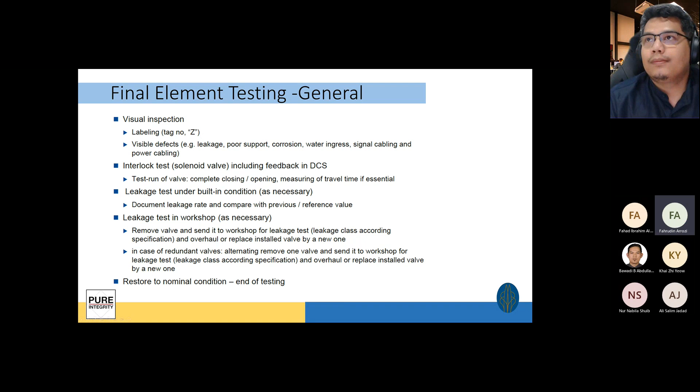I've experienced dealing with a consultant and need to get the LOPA, and for one of the facilities, actually, for the LOPA revalidation, at the beginning of the project, the facility SIL determination used the risk graph, and then after several years, 5 years, the validation assessment for that facility, part of the PSC validation, used the LOPA method. In general, the result is the risk graph is more conservative compared with the LOPA. So is that common, something you've found in several areas? At least for the several we assessed, risk graph is more conservative compared to LOPA.